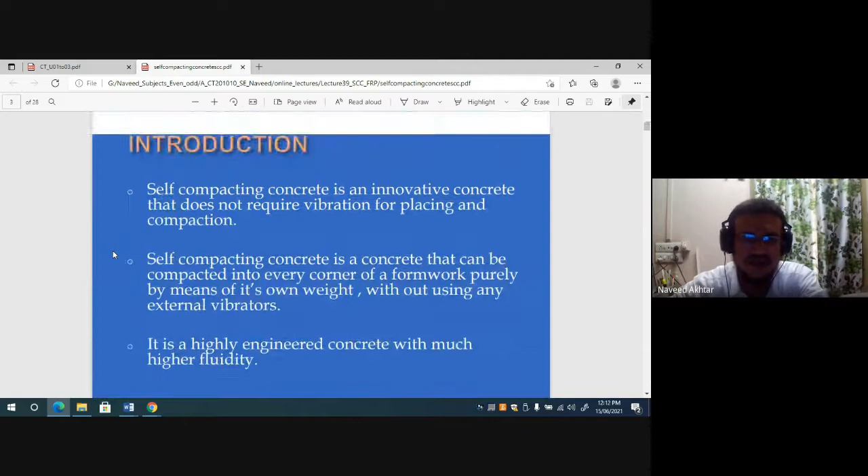Self-compacting concrete means no external equipment or agency is required to compact the concrete. The concrete will self-level itself, so it is also called self-consolidating concrete or self-leveling concrete. These concretes don't need any external agent for compaction or vibration. Self-compacting concrete is an innovative concrete that does not require vibration for placing and compaction.

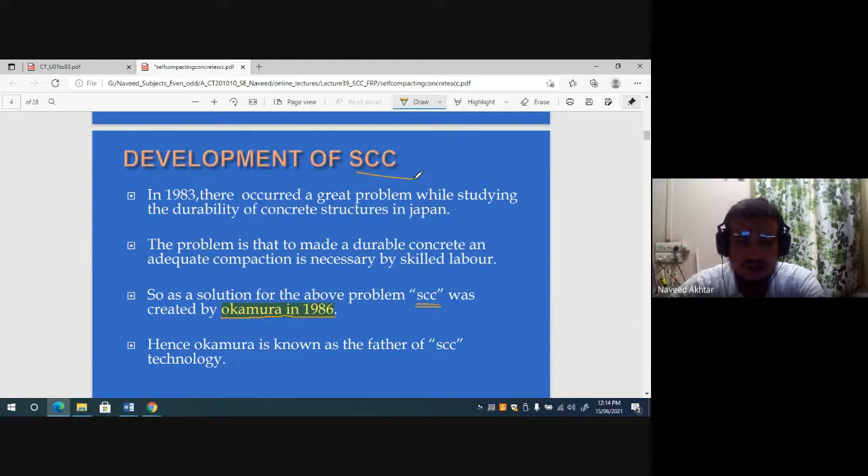Hence, Okamura is known as the father of self-compacting concrete technology. In 1986, he developed the self-consolidating or self-compacting concrete in Japan.

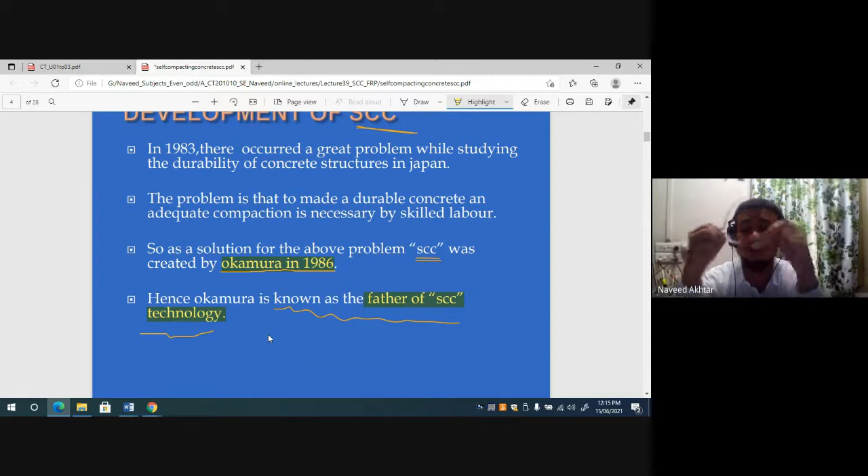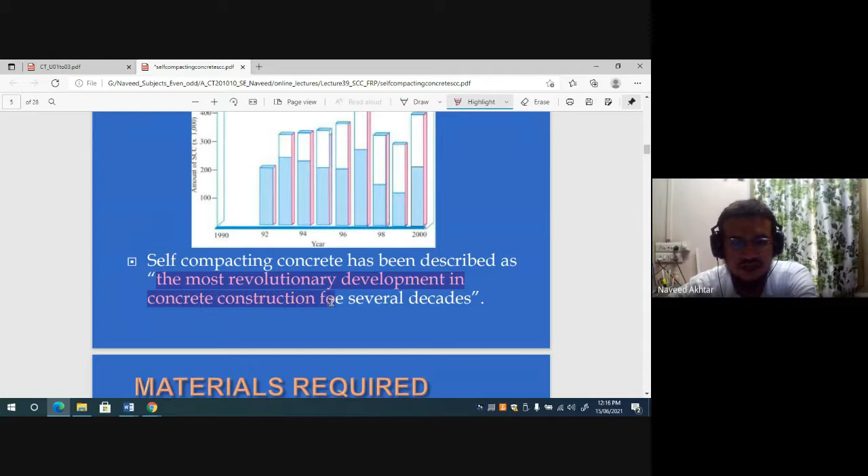At first, self-compacting concrete was only used in prefabricated products and ready-mix concrete in Japan, preferred for prefabricated work and ready-mix concrete. Self-compacted concrete has been described as the most revolutionary development in concrete construction for several decades.

So what is the material required for self-compacted concrete? Cement as required in normal concrete, fine aggregate, coarse aggregate, water - these are the normal components or ingredients of concrete.

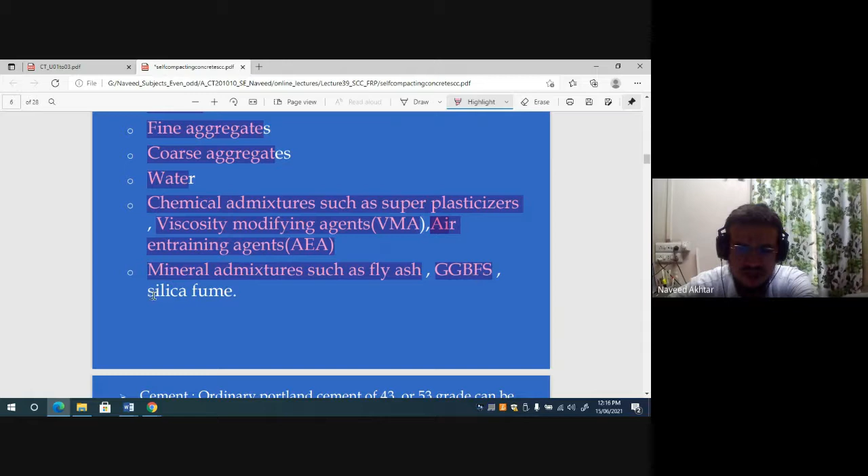Chemical admixtures such as superplasticizers, viscosity modifying agent (VMA), air entraining agent (AEA) are required for self-compacting concrete. Mineral admixtures such as fly ash, ground granulated blast furnace slag, silica fume are also required for self-compacting concrete.

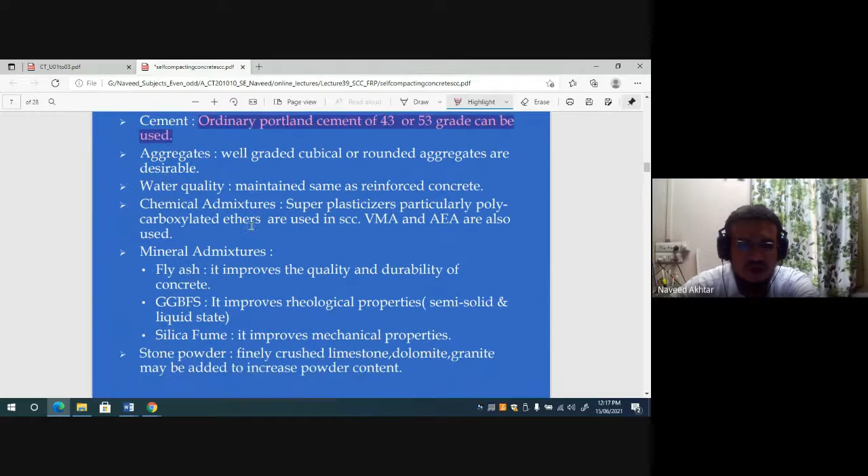Cement may be ordinary Portland cement, 43 grade or 53 grade. Aggregate, water quality, chemical admixtures as explained above, and stone powder if required - limestone or dolomite or granite may be added to increase the powder content if required.

Now you can see the comparison between normal concrete and self-compacting concrete. In normal concrete we have water at 18%; in self-compacting concrete, water is increased to about 20%. Coarse aggregate is 46% in normal concrete, but reduces to 28% in self-compacting concrete.

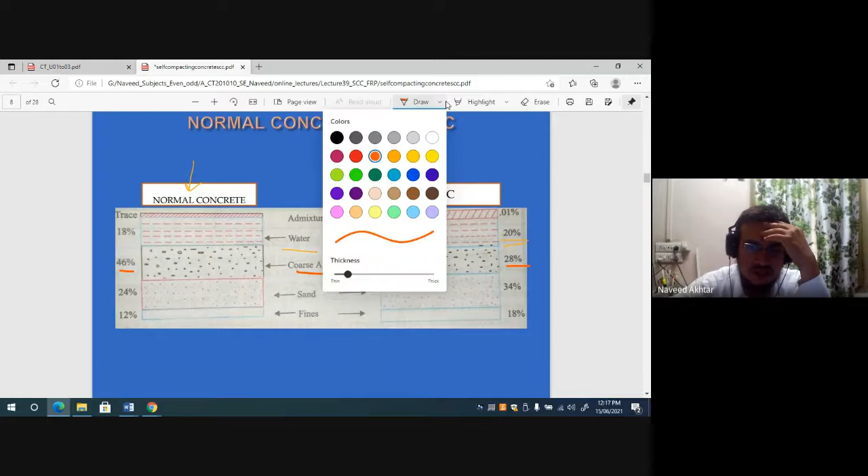Sand is required at 24% in normal concrete, but in self-compacting concrete the percentage of sand is increased - fine aggregate percentage increases while coarse aggregate percentage decreases. Fines are 12% in ordinary concrete, and about 18% in self-compacting concrete. That is the difference between normal concrete and self-compacting concrete.

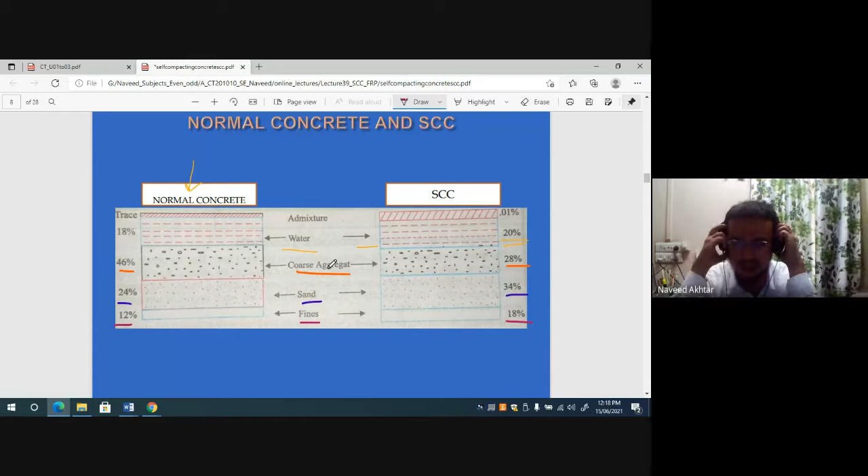In normal concrete, coarse aggregate is in large quantity, but in self-compacting concrete, fine aggregate is in large quantity - fine particles are more as compared to coarse aggregate. We also need admixtures to make self-compacting concrete - chemical admixture and mineral admixture in terms of fines, that is fly ash, cement, or water.

This is called cementitious material. Cementitious material can be used for self-compacting concrete, and water content is also a little bit more as compared to normal concrete.

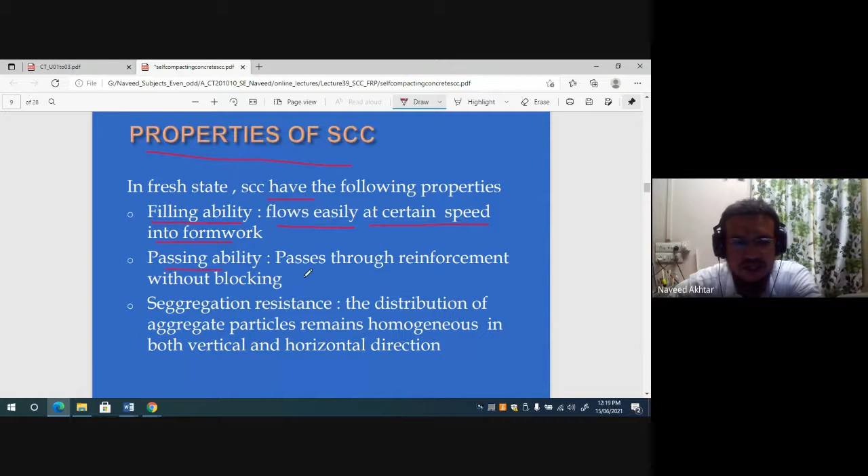So what are the properties of self-compacting concrete? In fresh state, the following properties: filling ability - flows easily at a certain speed into the formwork; passing ability - passes through reinforcement without blocking; segregation resistance - distribution of aggregate particles remains homogeneous in both vertical and horizontal direction. These are the fresh state properties of self-compacting concrete.

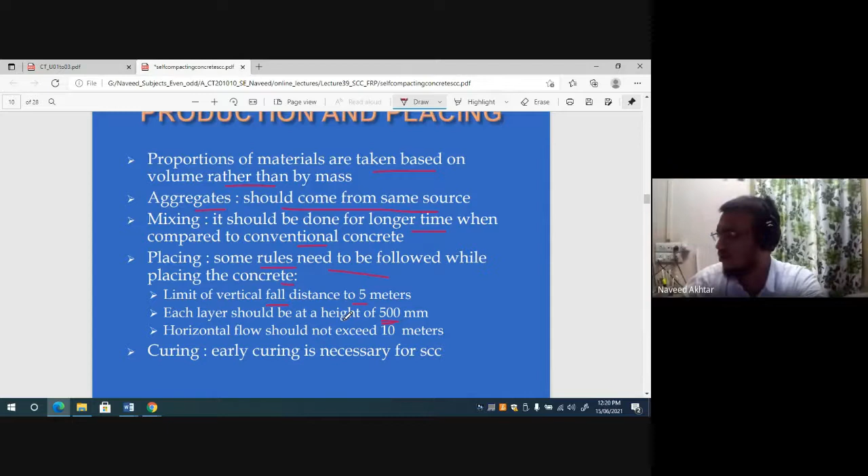Limit the vertical fall distance to 5 meters. Each layer should be at a height of 500 mm. Horizontal flow should not exceed 10 meters - these are the limiting values. Early curing is necessary for self-compacting concrete.

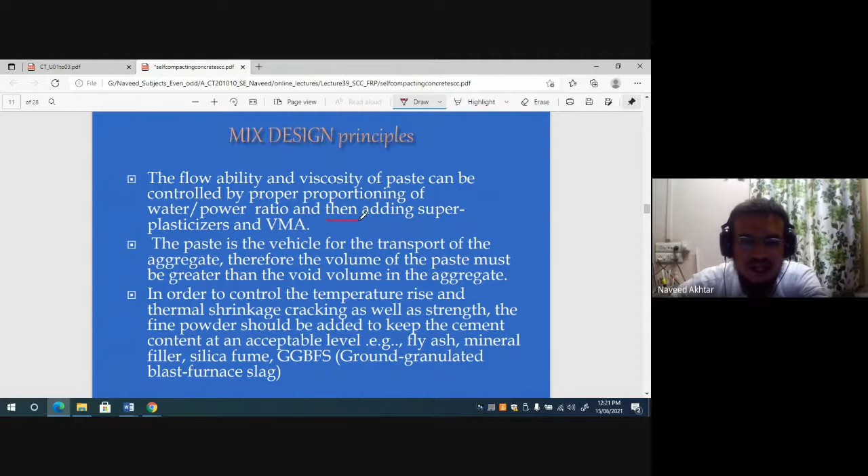Then, the mix design principle: the flowability and viscosity of paste can be controlled by proper proportioning of the water-powder ratio, and then adding superplasticizer or viscosity modifying agents.

The paste is the vehicle for the transport of the aggregate. Therefore, the volume of paste must be greater than the void volume in aggregate for self-compacting concrete. In order to control temperature rise, thermal shrinkage, cracking, and strength, fine powder should be added to keep the cement content at an acceptable level. Examples include fly ash, mineral filler, silica fume, and GGBFS.

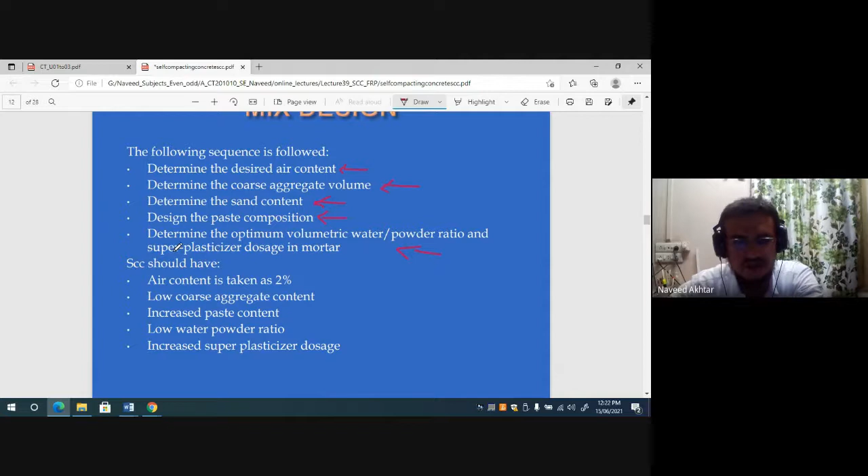The mix design should determine the desired air content, determine the coarse aggregate volume, determine the sand content, design the paste composition, determine the optimum volumetric water-powder ratio, and superplasticizer dosage. Air content is taken as 2%. Low coarse aggregate, increased paste content, low water-powder ratio, and increased superplasticizer dosage can give a good mix design.

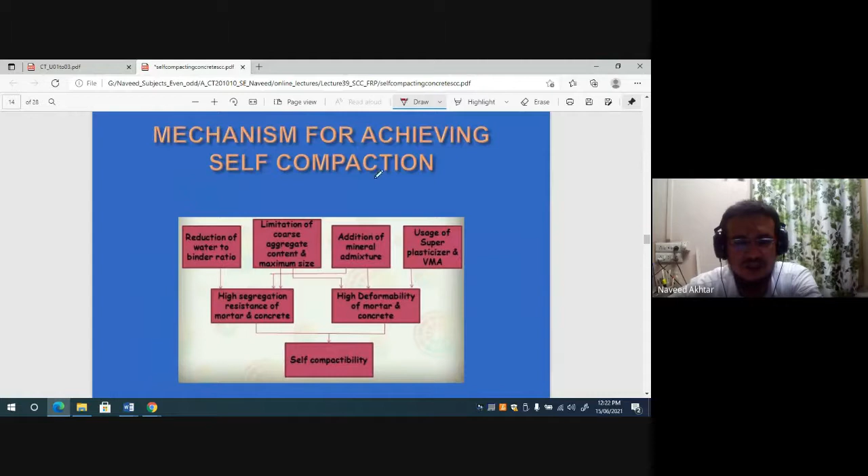The mechanism for achieving self-compacting concrete is the reduction of water-binder ratio, limitation of coarse aggregate content, addition of mineral admixture, and usage of superplasticizer or chemical admixture, or viscosity modifying agent.

This gives high segregation resistance for the mortar. It avoids large quantity of coarse aggregate and gives high deformability of mortar and concrete if you add fly ash, mineral admixture, and finer aggregate in large quantity. By doing so, you can achieve self-compacting concrete.

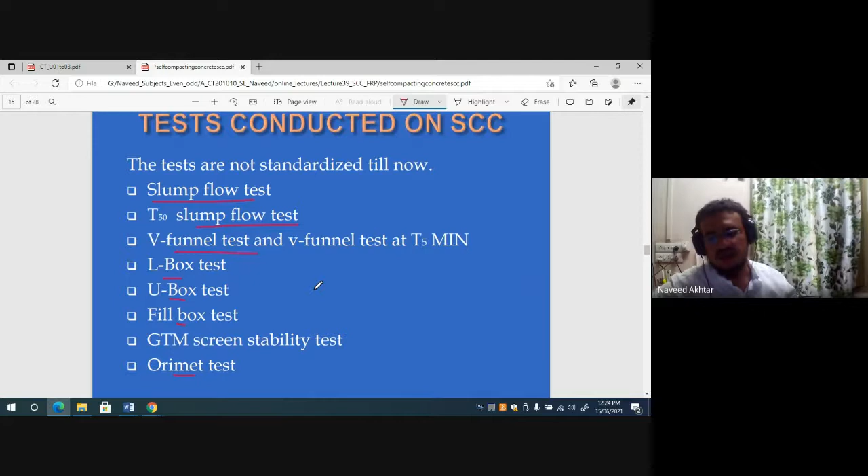The tests conducted on self-compacting concrete are the slump flow test, T50, V funnel test, L box, U box, fill box test, GTM screen stability test, and Orimet test. These are different tests you can conduct to find out the flowability or fillability of your self-compacting concrete, or the consolidability of your self-compacting concrete.

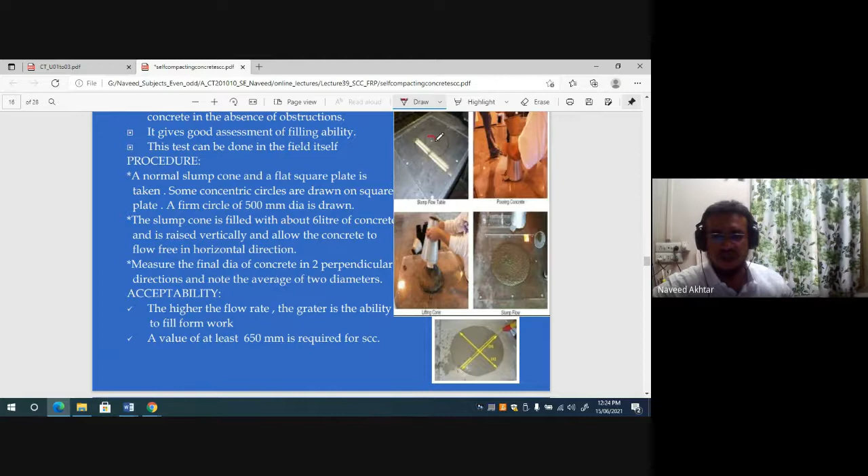So for the slump flow test, similar to how we find slump, you fill the mold. This is the slump flow table or plate you have to put there. There is an inside mark to put the slump properly, and an outer mark of 600 or 500 mm to measure the slump.

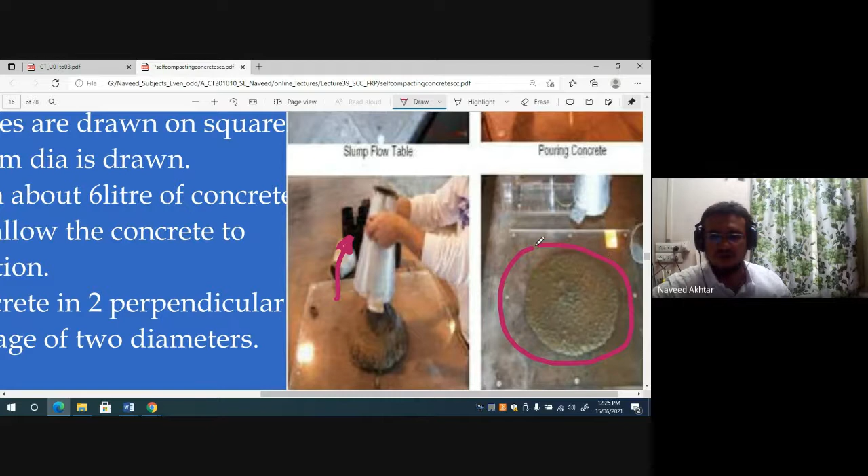Pouring of the concrete is done with a scoop, then you lift the slump cone upward straight and flow takes place. This is the flow of your concrete. You have to measure the flow in two directions orthogonal to each other, D1 and D2, observe the two readings, and take the average, which gives you the flow of your concrete.

The acceptability criterion is: the higher the flow rate, the greater the ability to fill the formwork. A value of 650 mm is required for self-compacting concrete, so the average of D1 and D2 should be 650 mm.

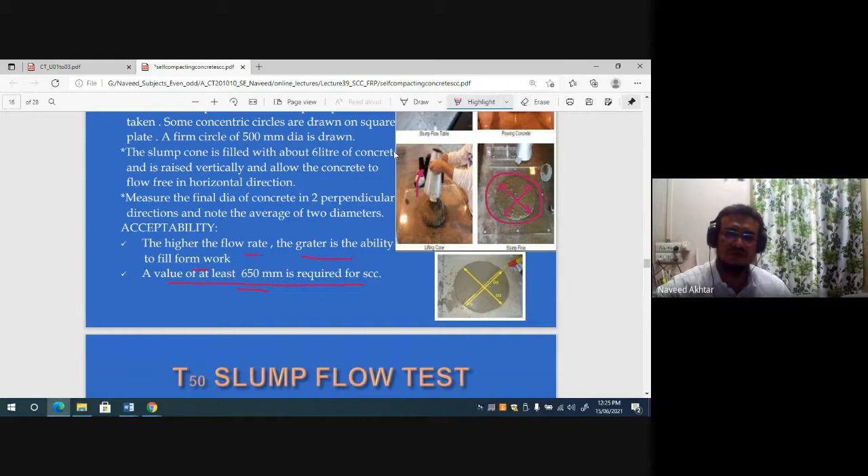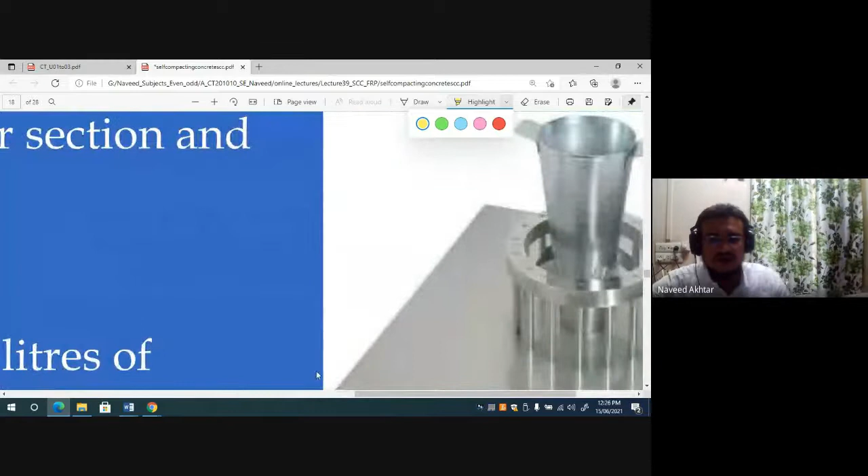Then another method is the T50 slump procedure for the test, and the J-ring test. The J-ring test is performed to find out the passing ability of the self-compacting concrete. This is the J-ring apparatus. These are the rings, and this is the cone where the concrete is placed, and then you perform the test.

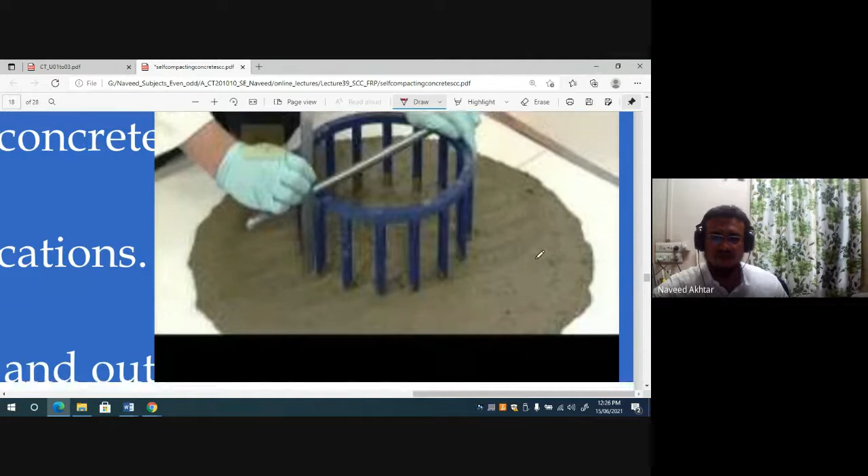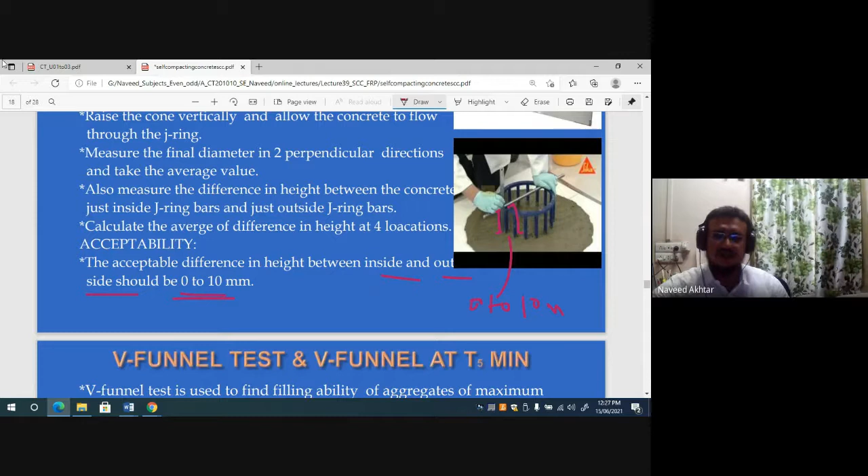After pouring the concrete, you can see the passing ability of the self-compacting concrete, and you measure the height from the top surface of the concrete to the top of the J-ring, which gives the passing ability of the concrete. You take the reading at four places, and the acceptable difference in height between inside and outside should be 0 to 10 mm. The inside concrete level and outside concrete level are measured, and that difference should not be more than 10 mm.

That is the J-ring test. You can search this on the internet also, how to perform the J-ring test for self-compacting concrete. You can search online, type J-ring test for self-compacting concrete, and easily find a video.

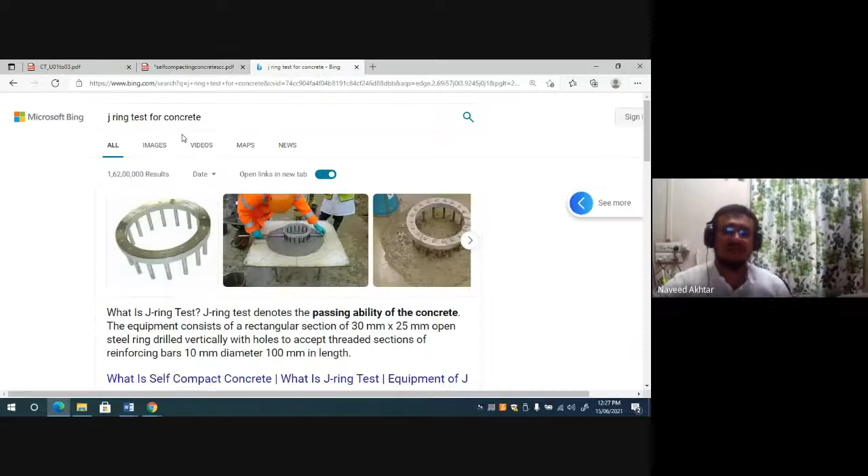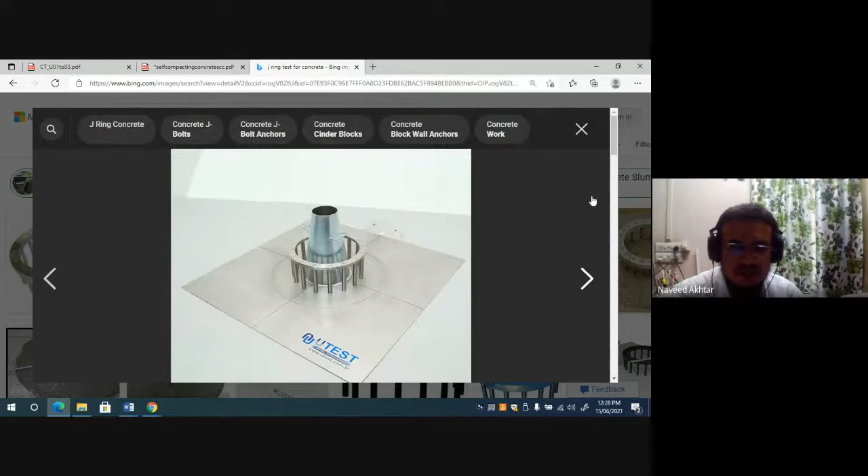This is the apparatus in the photograph, visible to you. This is the J-ring, and you can see how to perform the J-ring test. The inner height and outer height are measured, and this difference should not be more than 0 to 10 mm. That is all about the J-ring test. You can see the video also, you can click on the videos. Many videos on the J-ring test are available, and you can learn how to do it.

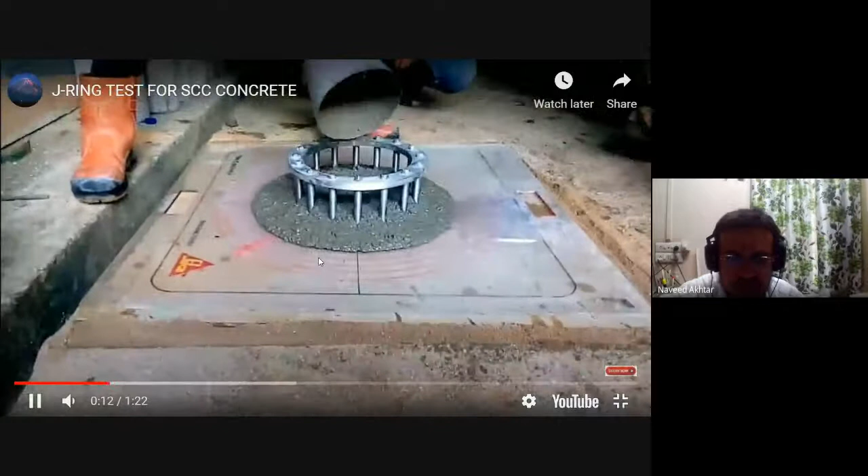You can see how to perform the J-ring test. You have to fill the mold, then straight-edge it, and see between the bars whether this concrete is passing. So to know the passing ability of your concrete, this test is performed.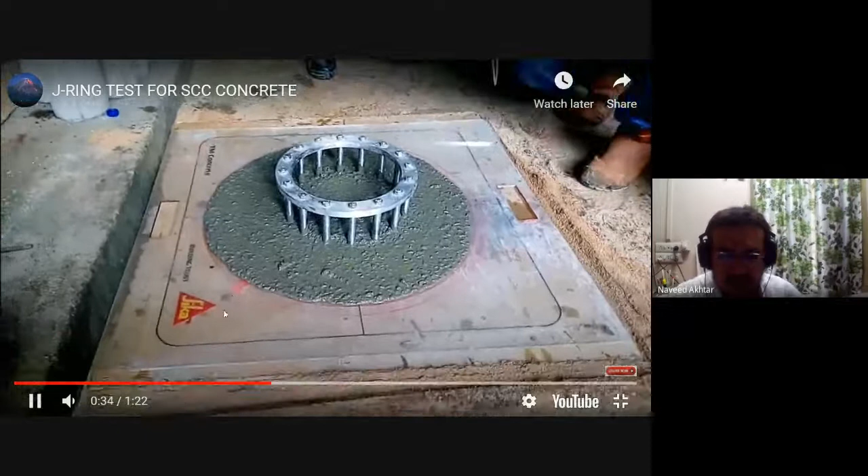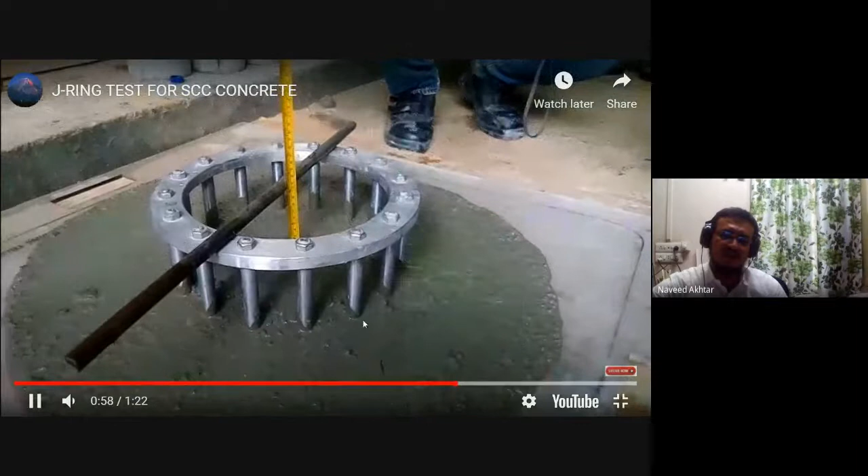The concrete is automatically self-leveled. This test is performed on self-consolidating or self-compacting concrete, and measurement of the inner and outer height of the concrete from the J-ring to top is taken. You can put this bar and measure using a tape for exact measurement. So inner height is measured, and you also need to measure the outer height. The difference between inner and outer height should not be more than 10 mm.

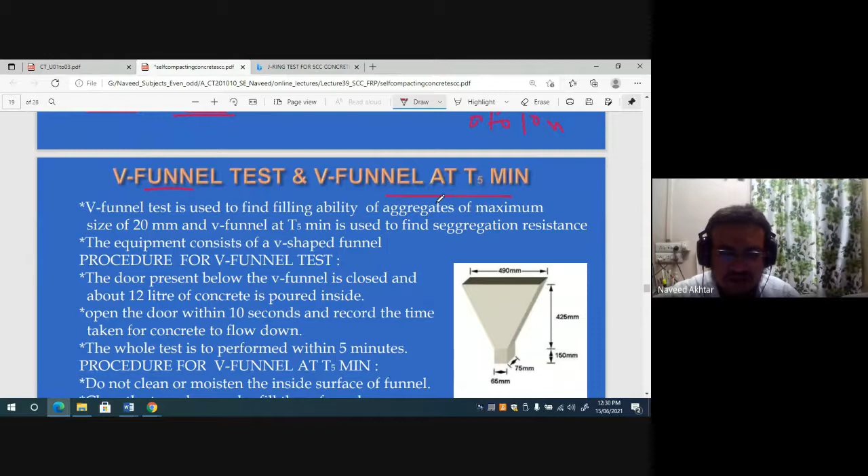So this is the J-ring test, and the V-funnel test is V-funnel at T5 min. You can see the V-funnel here - its dimension is given for concrete, while for mortar the size is different. The opening aperture is 65 by 75 mm, the height of this aperture portion is 150 mm, the top where you pour the concrete is 490 mm, and the height of the conical shaped portion of the funnel is 425 mm. Then you have to pour the concrete in the V-funnel and see how to perform the V-funnel test on self-compacting concrete.

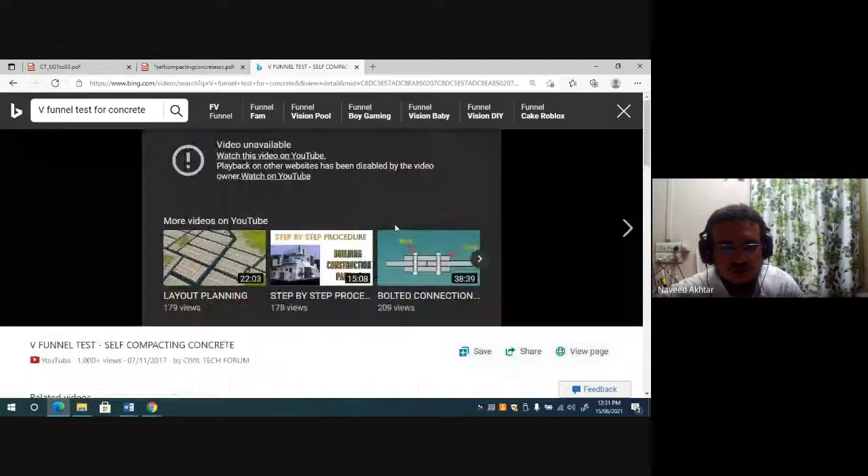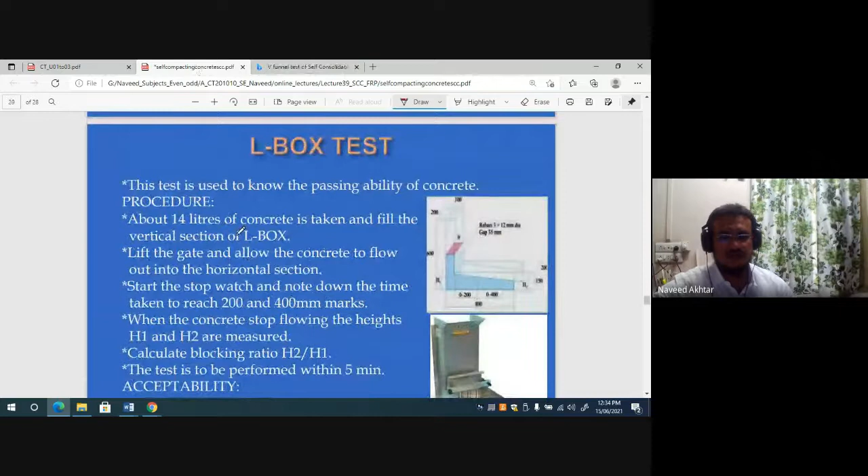Similarly, another test you can perform is the L-box test - it also gives the passing ability of your concrete. Also, the U-box test gives the passing ability of your concrete. So these are different tests to be performed on self-compacting concrete.

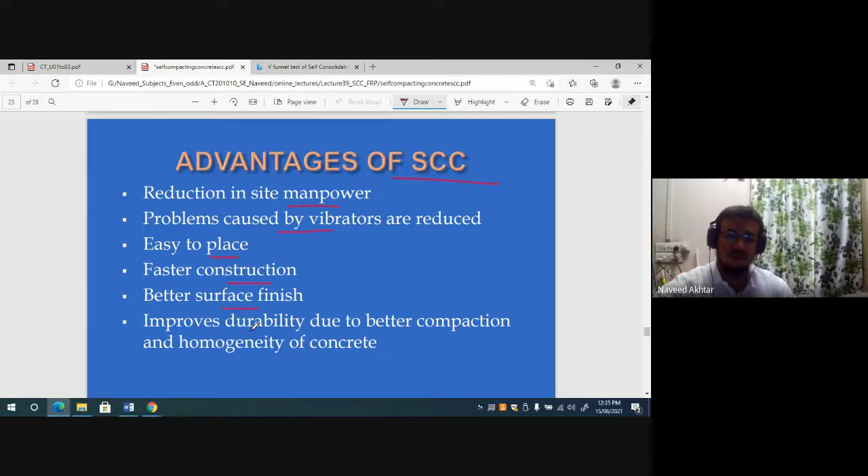The advantage of self-compacting concrete is that we don't need a vibrator or mechanical means for compaction, and manpower requirement is reduced. Problems caused by vibrators are reduced. It's easy to place, gives faster construction since no compaction is needed, and gives better surface finish, improving durability due to better compaction and homogeneity of the concrete. These are the advantages of self-compacting concrete.

Now we'll come to the second part, which is fiber reinforced concrete. We are using fiber to increase the flexural strength of concrete, and different fibers can be used.

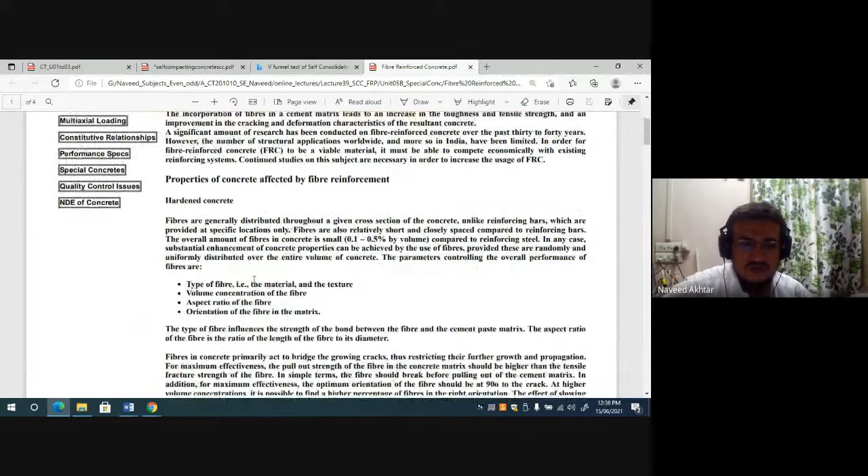Plain Portland cement concrete is a brittle material - you know plain concrete is a brittle material. So to avoid this brittleness, we are using fibers in the concrete to avoid cracks.

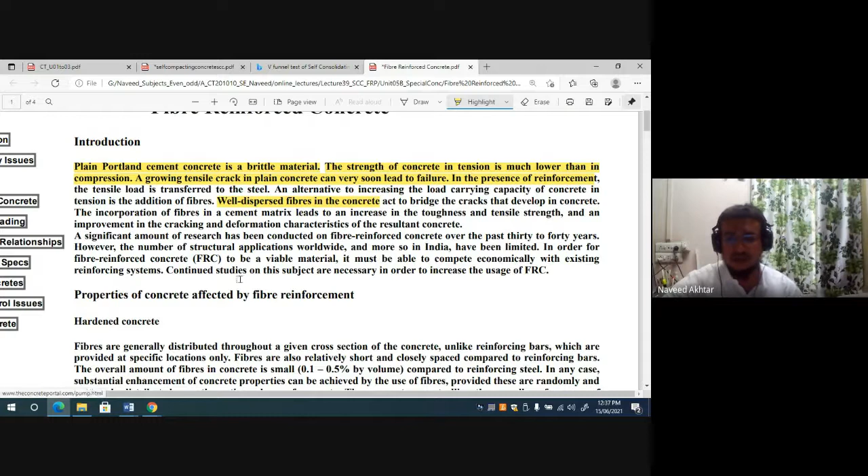The strength of concrete in tension is much lower than in compression. A growing tensile crack in plain concrete can very soon lead to failure. In the presence of reinforcement, the tensile load is transferred to steel, an alternative to increase the load carrying capacity of concrete in tension. If we apply well-dispersed fiber in the concrete, it acts as a bridge across cracks that develop, and the incorporation of fiber in a cement matrix leads to an increase in toughness, tensile strength, and improvement in cracking and deformation characteristics of the resultant concrete.

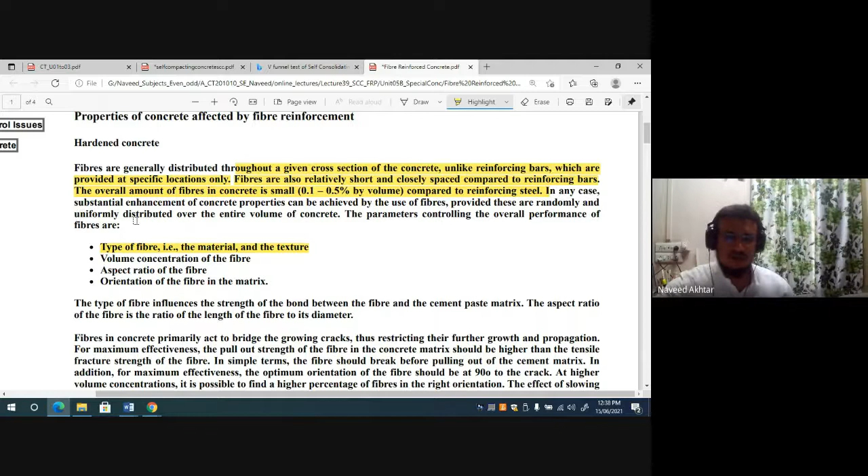There are different types of fibers that can be used. Fibers are generally distributed throughout a given cross-section of concrete, unlike reinforcing bars which are provided in specific locations only - fibers are distributed overall. Fibers are also relatively short and closely spaced compared to reinforcing bars. The overall amount of fiber in concrete is 0.1 to 0.5% by volume compared to reinforcing steel. In any case, substantial enhancement of concrete properties can be achieved by use of fibers, as fibers primarily act as a bridge to growing cracks, restricting their further growth.

There are many conventional fibers typically used as particles in concrete. They do not significantly affect the compressive strength of concrete, but on the other hand, ultimate tensile strength of concrete can be greatly enhanced by using fibers. There are many such fibers you can use - this U-box, L-box - just now we have seen the J-ring, U-box, and L-box tests.

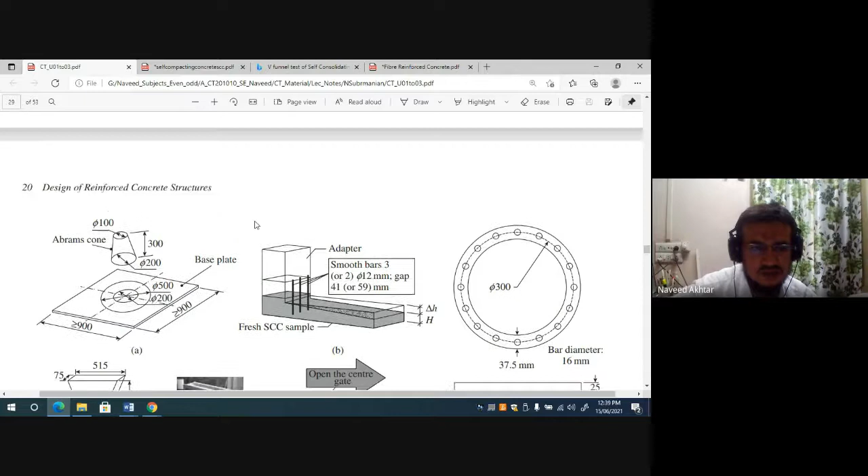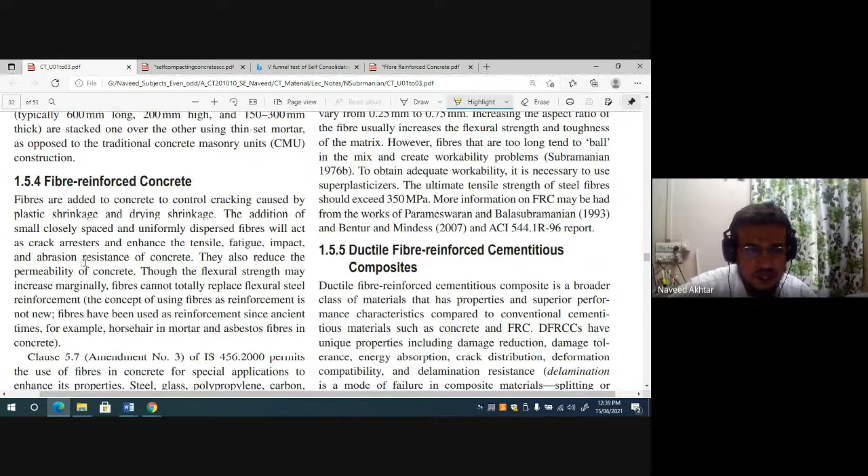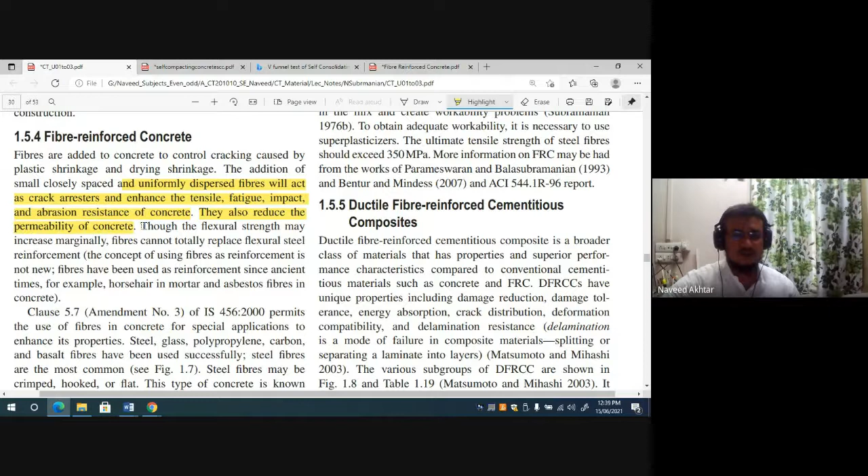Fiber reinforced concrete uses fibers added to concrete to control the cracking caused by plastic shrinkage and drying shrinkage. The addition of small, closely spaced and uniformly dispersed fibers will act as a crack arrestor and enhance the tensile strain, fatigue strain, impact strain, and abrasion resistance of the concrete. They also reduce the permeability of concrete, though the flexural strength may be increased marginally.

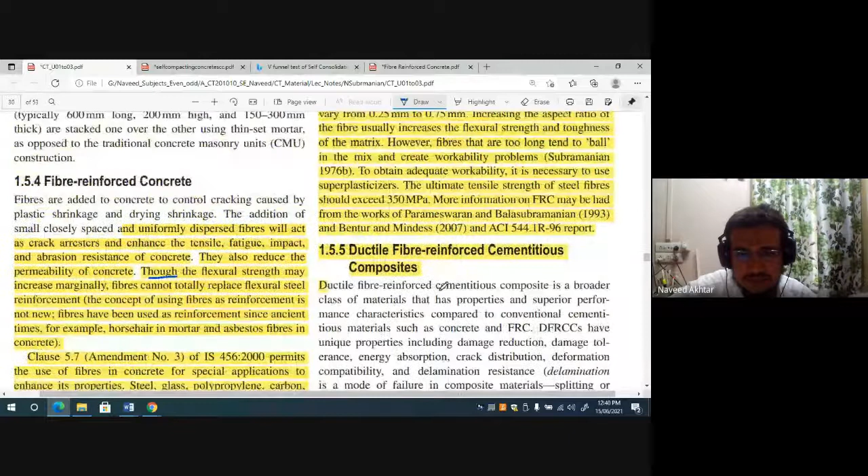So these are the fibers you can use in concrete. There are many such fibers, and the length and diameter of the fiber is called the aspect ratio. The aspect ratio of the fiber is the ratio of its length to the diameter. Typical aspect ratio ranges from 30 to 150 as per the requirement.

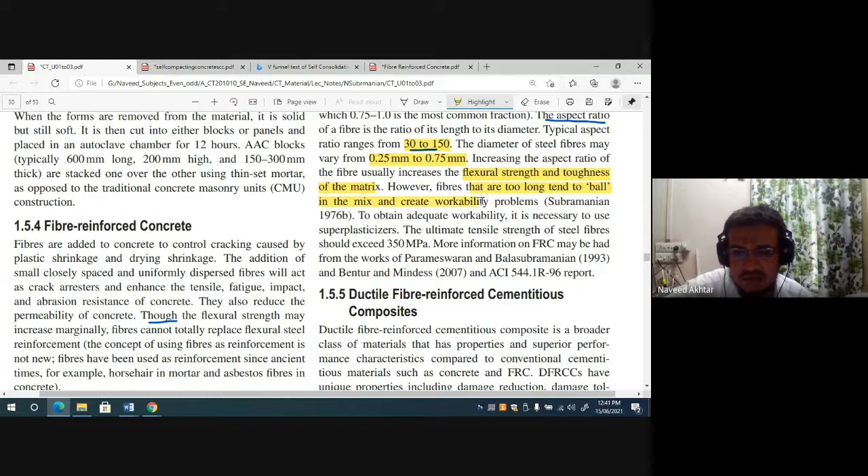So you can use that, aspect ratio from 30 to 150, and the diameter of steel fiber may vary from 0.25 to 0.75 mm. Increasing the aspect ratio of the fiber usually increases the flexural strength and toughness of the matrix. However, fibers that are too long tend to ball in the mix and create workability problems, which is why too-long fibers are avoided.

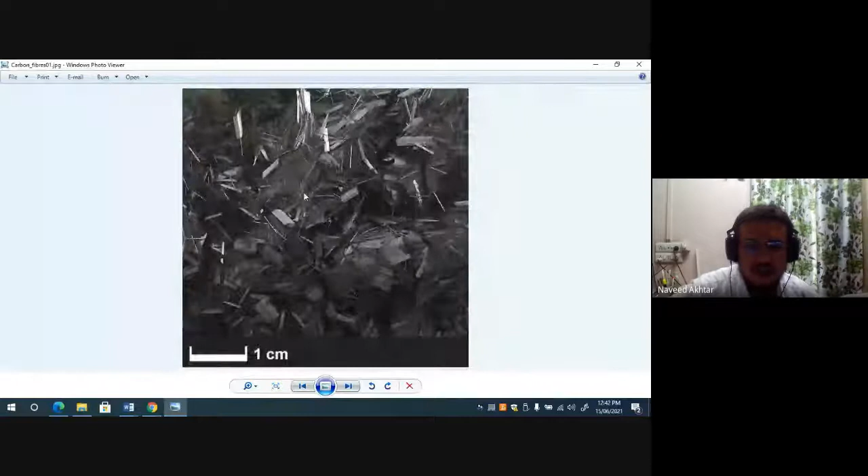They are very strong. You can see how small these fibers are - this 1 centimeter scale is given here. So these fibers are used - these are the carbon fibers. You can see they are very strong, their tensile strength is very strong, and they are used widely.

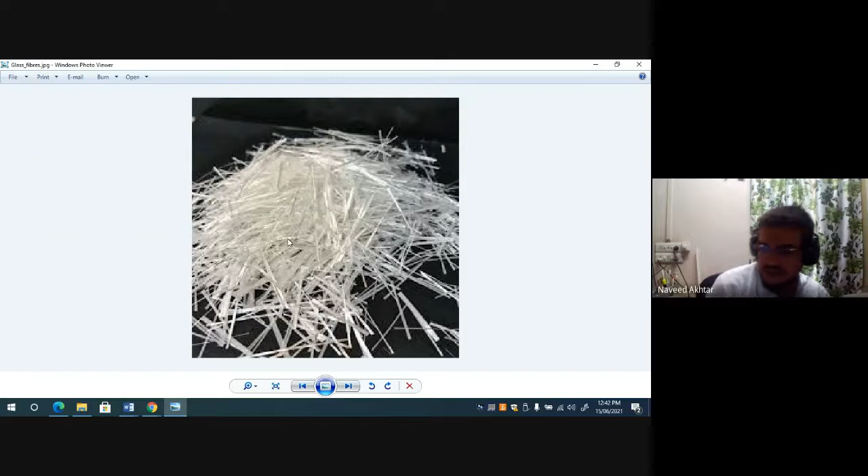You can see the glass fiber. Glass reinforcement concrete is also made, and very fine thickness walls of water tanks are produced by these glass fibers. Glass reinforcement concrete has very much durability and is used for facade or elevation purposes. These fibers are the glass fibers.

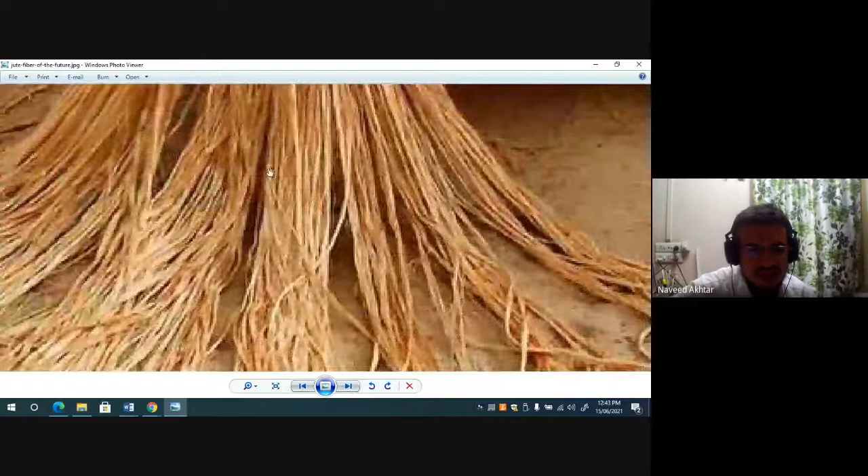This again is the jute fiber, and jute is also used for making bags for storing materials, the bags that you are preparing from jute. These are the jute fibers, and they can be used.

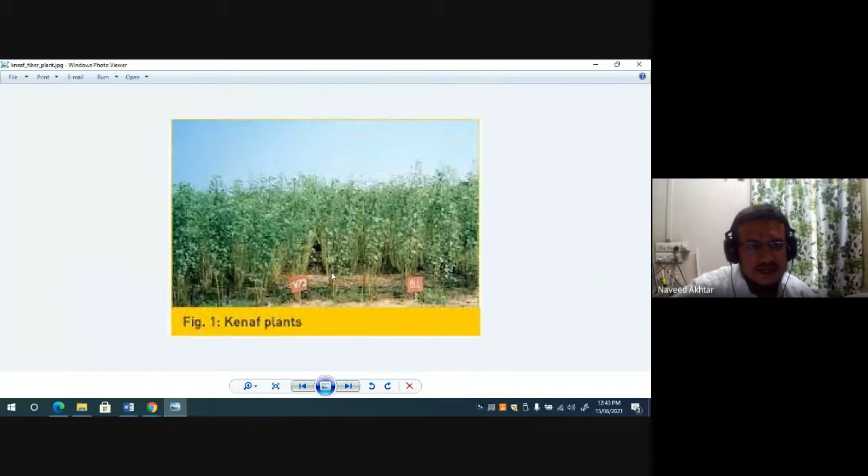This is the kenaf plant. Kenaf plant also gives us fiber, and after cutting this kenaf plant, you can get reinforced polylactic acid. You can see here the kenaf plant, these fibers are there, and this type of fiber you can also obtain from the kenaf plant.

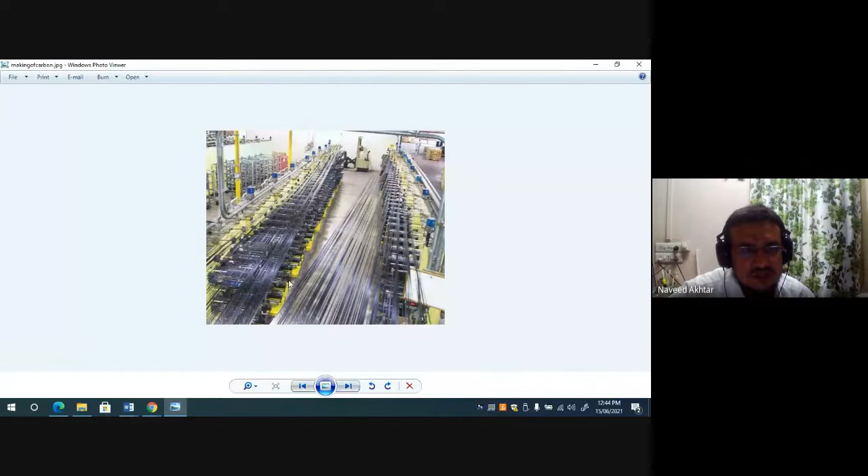All these are natural fibers - flax fibers are there, and this is the making of carbon fiber in the factory. You can see the strength of carbon fiber is more than steel fibers.

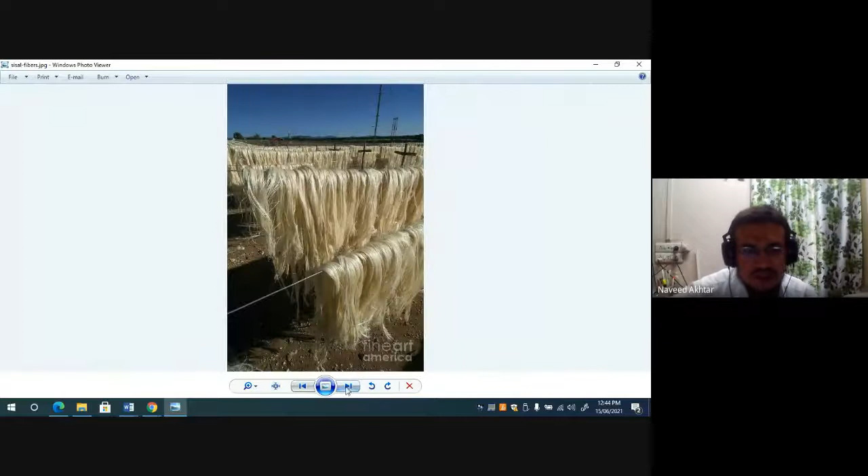This is the sisal fiber, from the sisal plant - the fiber is cut down from the leaf of this plant. You can obtain the fiber after drying the leaf, and get the fiber like this. This is the sisal fiber - you can see it's very shiny and very strong. All these sisal fibers are used for various equipment.

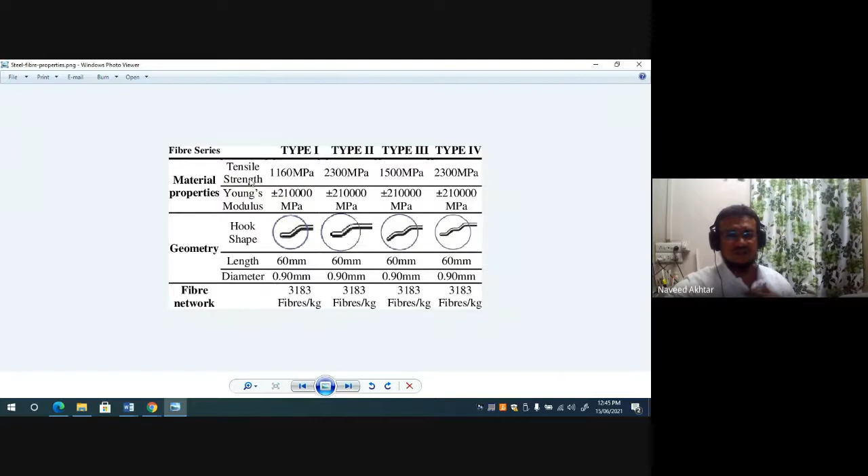This is the steel fiber. You can see steel fibers of different shapes - this one having the crimped shape. Type 1, type 2, type 3 steel fibers are there. You can see the geometry - this hook shape, different hooks are provided, and that is the fiber.

You can see the round crimped type fiber - that is the steel type fiber used where we need industrial flooring, where we need to increase the fatigue resistance or flexural resistance. We use this fiber in the concrete, which is why it's called fiber reinforced concrete.

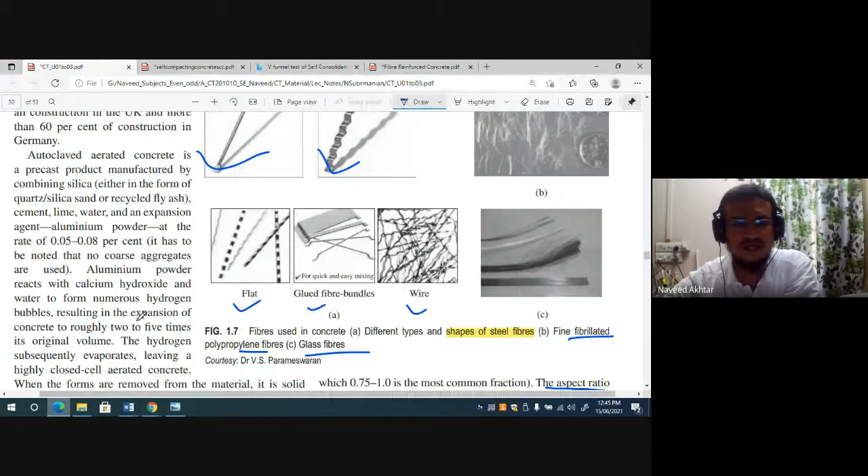So you may understand from this - these are the fiber reinforcement concretes, and the fiber aspect ratio is generally the length to diameter ratio, called aspect ratio. Many such things are available on the internet - you can download and study.

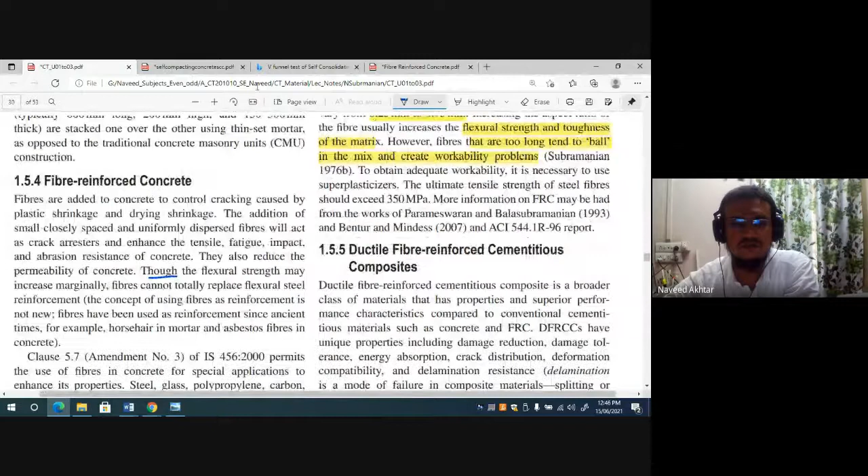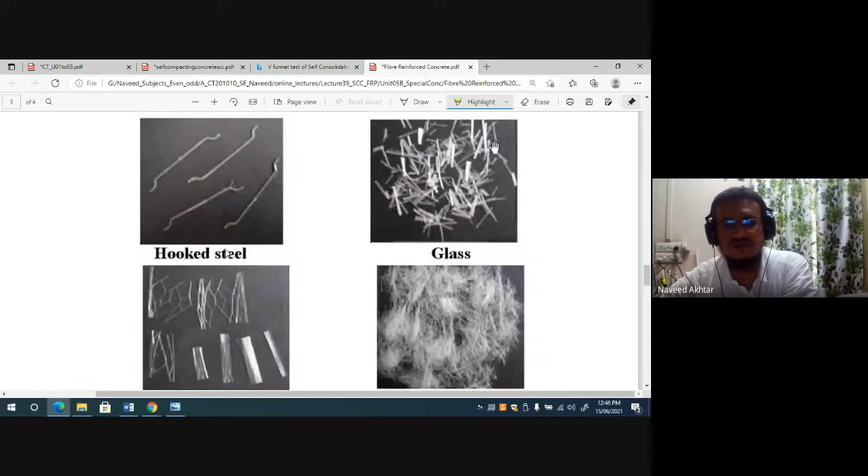Now we are studying fiber reinforcement concrete. The flexural strength of concrete is increased by fibers. We have already seen hooked steel, glass fibers, polyester fiber, and polypropylene fibers. Various types of fibers are available in the market, and you can use any one of them.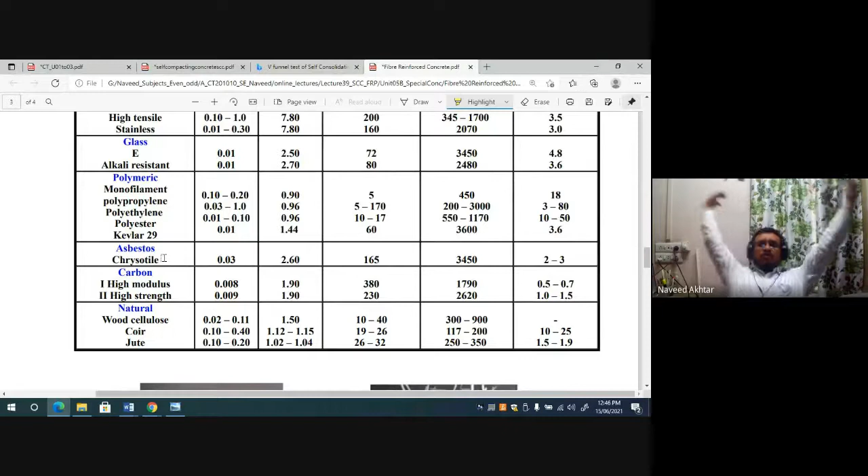These are some of the properties: density, modulus, tensile strength and strain at failure for different fibers - steel, glass, polymeric. Asbestos fiber is also used for preparing roof sheeting, and carbon fiber and natural fibers like coir, wood, sisal, jute are also used. Many such fibers are available and you can use them.

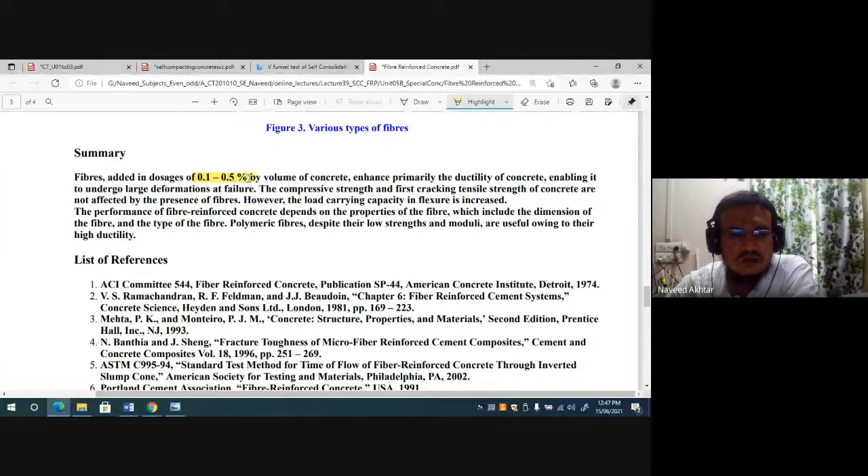Fibers added in a dosage of 0.1 to 0.5% by volume of concrete enhance the ductility of concrete, enabling it to undergo large deformation at failure. The compressive strength and first cracking tensile strength of concrete are not affected by the presence of fiber.

The load carrying capacity in flexure increases. The performance of fiber reinforced concrete depends on the properties of the fiber, including the dimension and type of fiber. Polymeric fiber, despite their low strength and moduli, are useful owing to their high ductility.

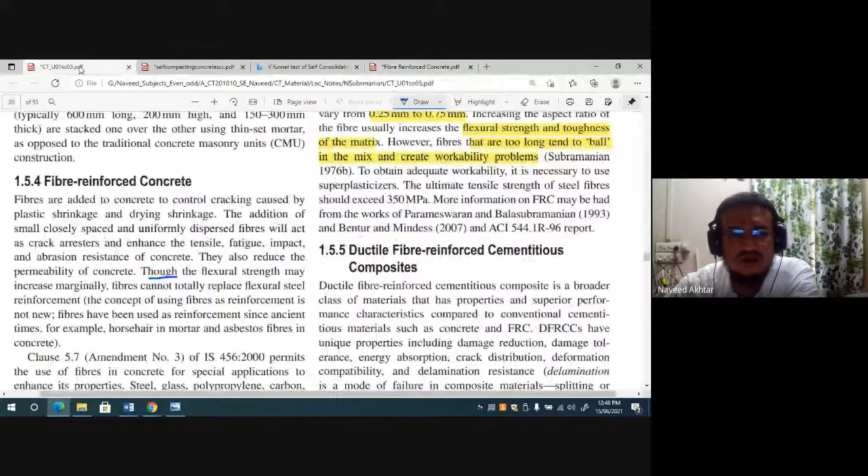So these are the fiber reinforcement concrete, and you can go for it as per your special requirement.

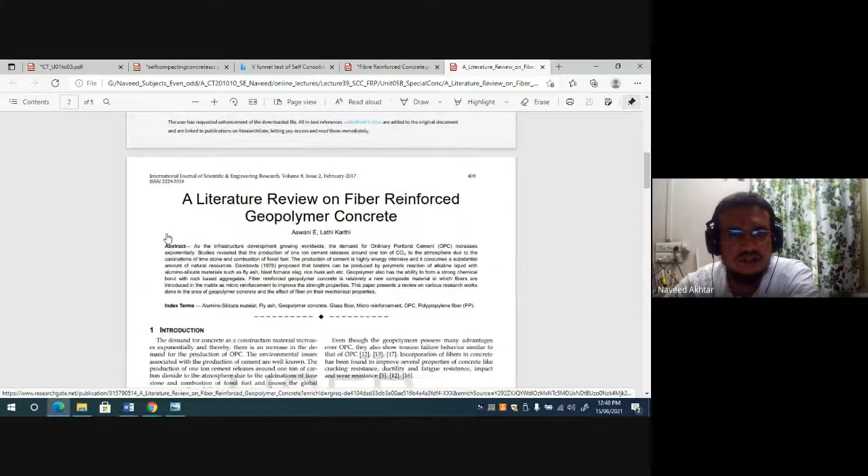Some special types of concrete are also there, and many papers are available on the internet. You can search and find literature on fiber reinforced geopolymer concrete. We will see in the next class how geopolymer concrete works, and you can use that.

So that is different types of fiber and special concrete in concrete technology, and many such papers on latest concretes are available in the market. Self-compacting concrete and self-healing concrete are also there - self-healing concrete automatically heals if there is a crack. Also, some reactive powder concretes are there.

Many such special types of concrete are required for special purposes, so you can download and study from the internet. Many types of new concretes are there. Reactive powder concrete is one developing composite material which allows the concrete industry to optimize material usage, generate economic benefit, and build structures that are strong, durable, and sensitive to environment.

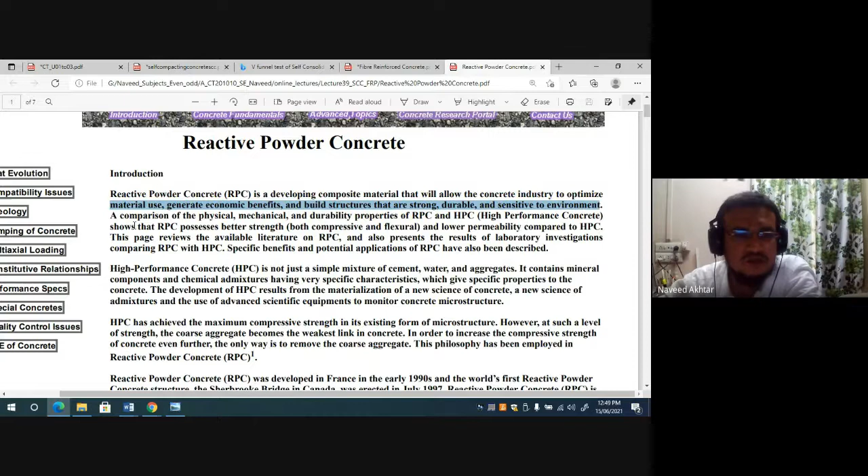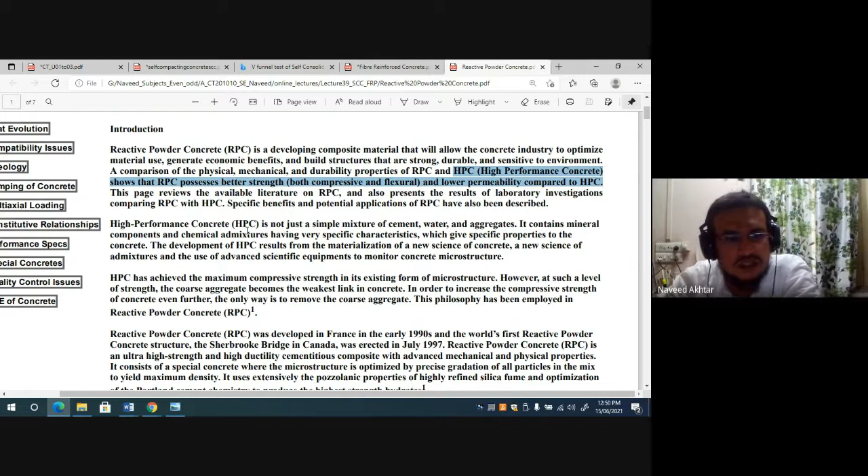For high performance concrete, we are also looking at reactive powder concrete. Comparing physical, mechanical, and durability properties, RPC (reactive powder concrete) possesses better strength in compression and flexure, and lower permeability compared to HPC (high performance concrete). You can search for different types.

This reactive powder concrete was developed in France in the early 1990s, and the first reactive powder concrete structure was the Sherbrooke Bridge in Canada, erected in July 1997.

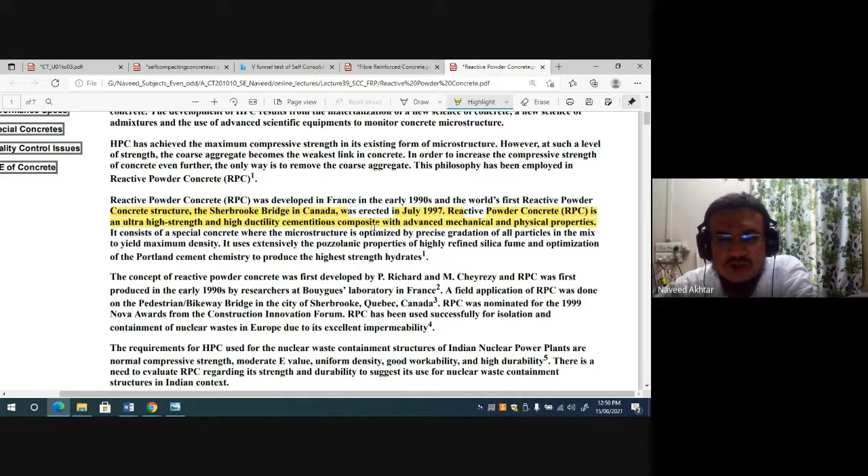Reactive powder concrete is an ultra-high strength, high ductility cementitious composite with advanced mechanical and physical properties. It consists of a special concrete where the microstructure is optimized with precise gradation. You can see different reactive powder concrete or different concrete types.

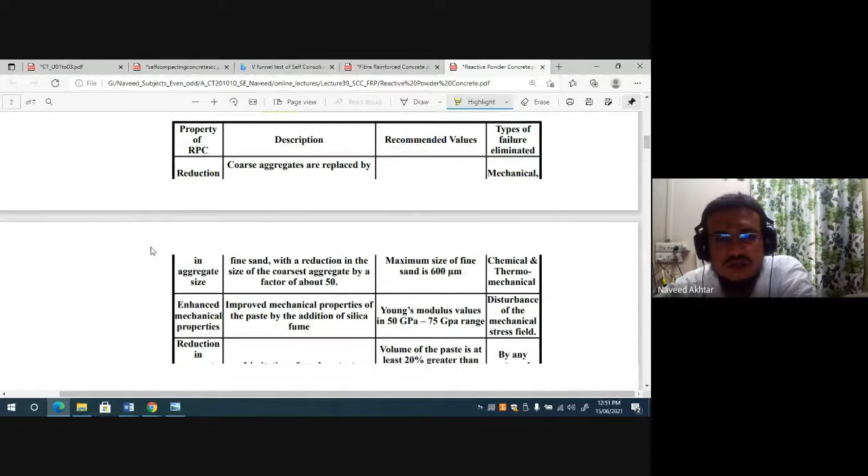Here are some points on enhancing homogeneity and strength of reactive powder concrete. The property of RPC includes reduction in aggregate size - basically coarse aggregate is replaced by fine sand, with reduction in the size of coarse aggregate by a factor of about 50, and maximum size of fine sand is 600 micrometers, along with mechanical, chemical and thermomechanical failure types.

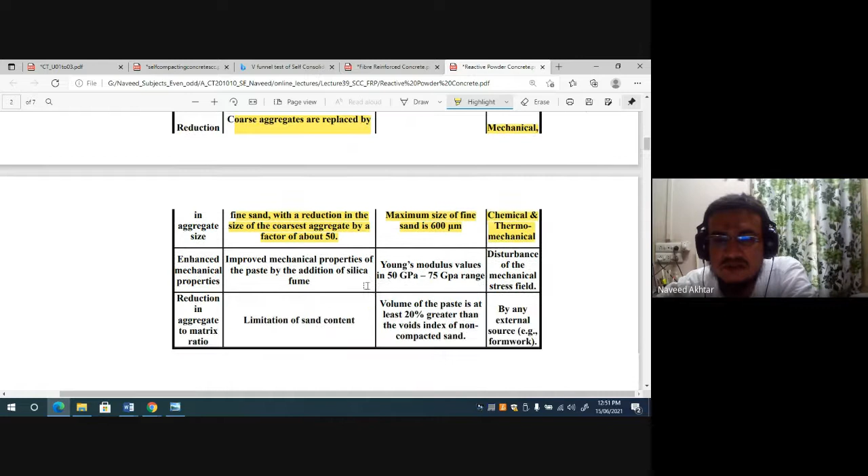So these are the different types of concrete you're seeing, and inshallah we will see some more different types of concrete in the coming lecture. That is all about the special types of concrete.